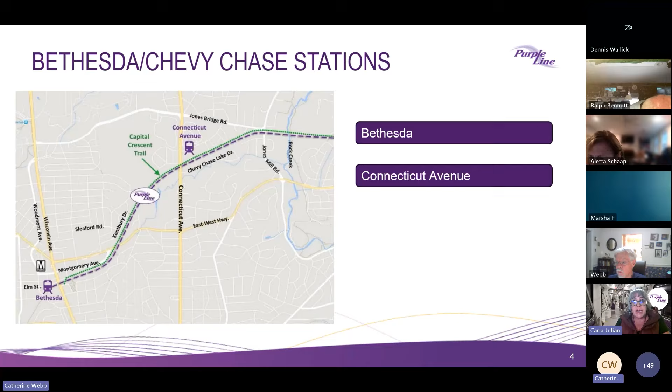The stations that we're looking at tonight are Bethesda and Connecticut Avenue.

And with that, I'm going to hand it over to Ray Biggs to introduce our fall progress video. Thank you, Carla. Again, welcome everyone, good to see you tonight, thank you for joining us this evening. As Carla mentioned, in our new fall 2025 progress video, the momentum on the Purple Line in 2024 has now evolved into a tremendous transformation throughout 2025. This video highlights some of the transformational progress across the 16-mile Purple Line alignment. So Chris, without further ado, let's play the video.

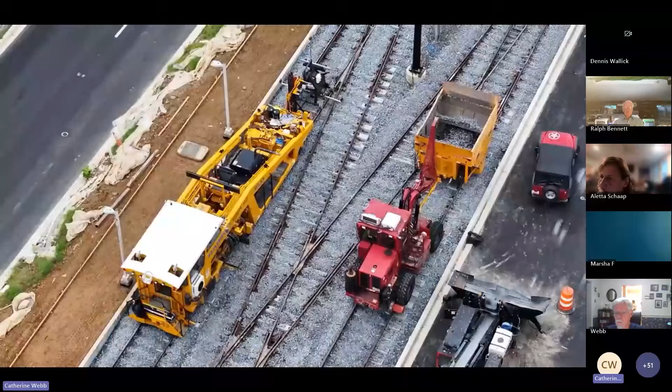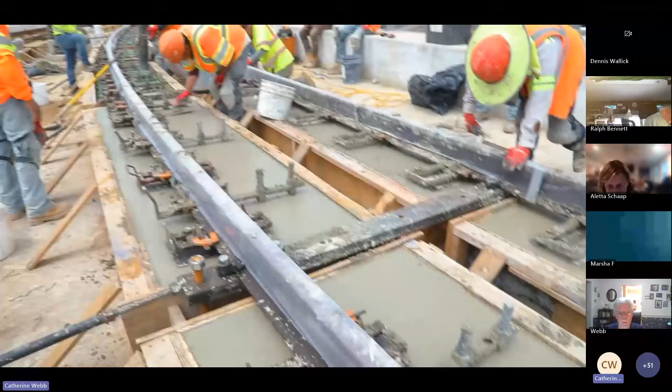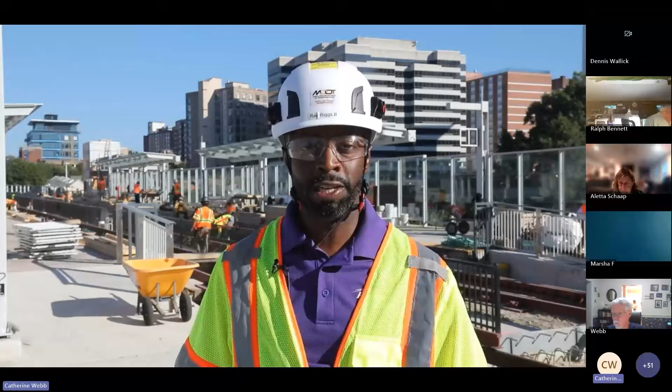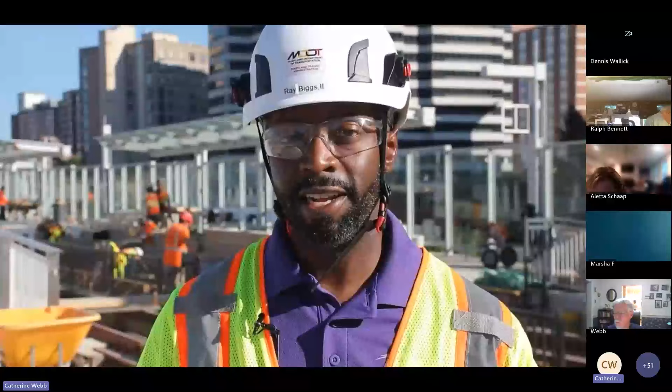It has truly been the year of transformation for the Purple Line project. With construction now more than 80% complete, the new Purple Line tracks tell the story. We are excited to share that tracks have been installed across all of Prince George's County, with more than 75% of tracks complete across the entire project.

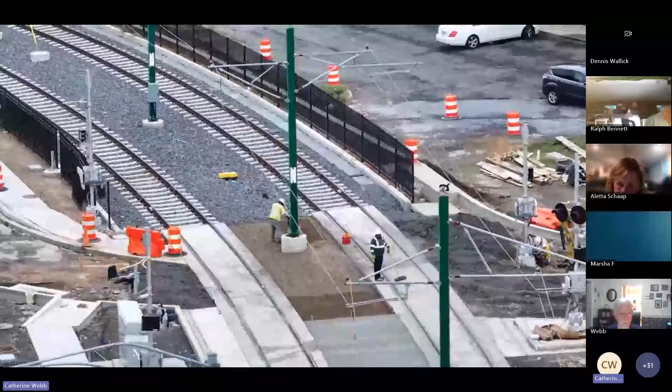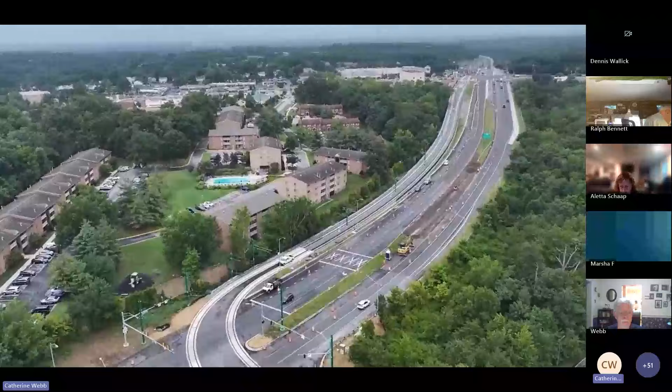Along with track installation, you have likely seen many overhead catenary system poles installed this year. These poles carry the wires that power the Purple Line. At the eastern end of the project, the poles and wires are not only installed, but have already been energized, ready to power up the light rail vehicles. Just a reminder, always assume light rail system power is on, and please be sure to avoid the Purple Line right-of-way areas. Only cross at designated areas and crosswalks, and be sure to look both ways before you cross.

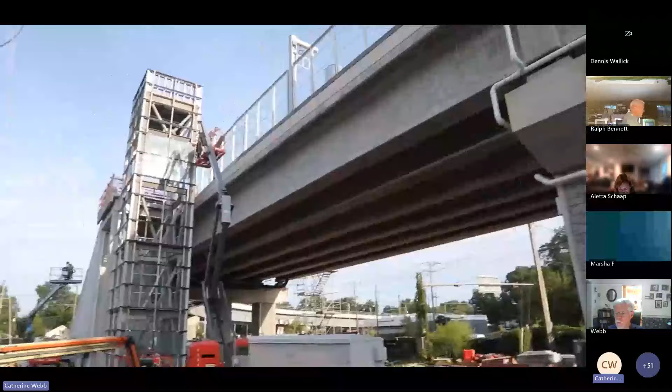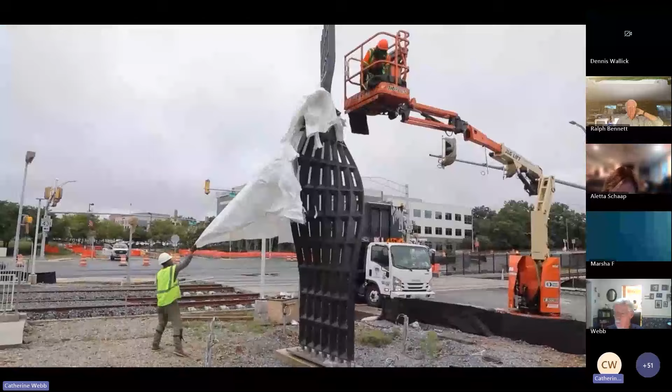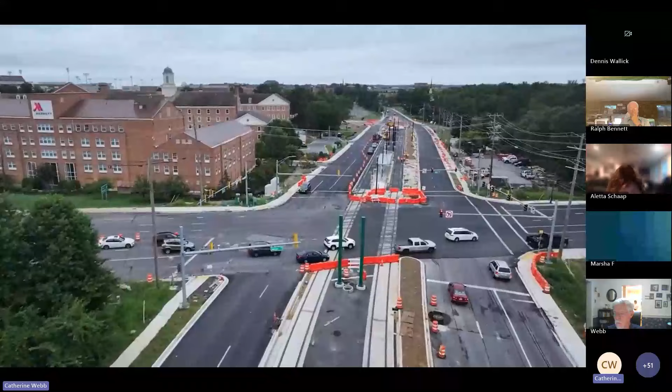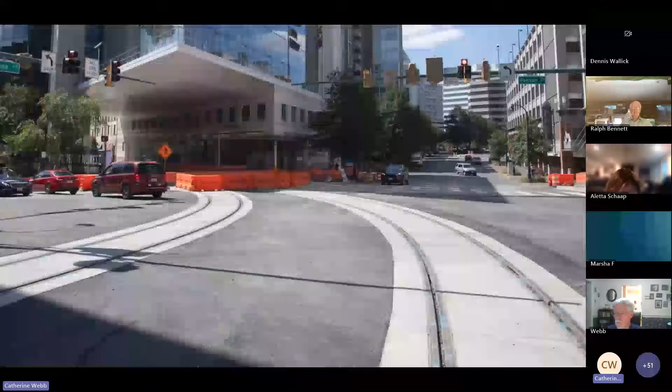Across the corridor, stations continue to progress. Canopies, benches, and art and transit installations are being added. Bronze spires in Riverdale, vibrant colors in Long Branch, and more to come. More than 20 roadway crossings that once required detours are now in their completed phase, including the complex intersection of Wayne Avenue and Fenton Street. With the tracks in place, Silver Spring residents can see the vision of a more connected community becoming reality.

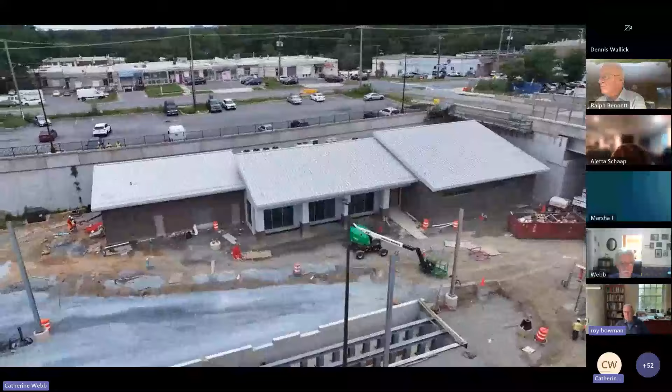In Lyttonsville, the second operations and maintenance facility is taking shape. This building and track yard will support the light rail vehicles with an additional control and communications facility and a smaller maintenance facility located in Montgomery County.

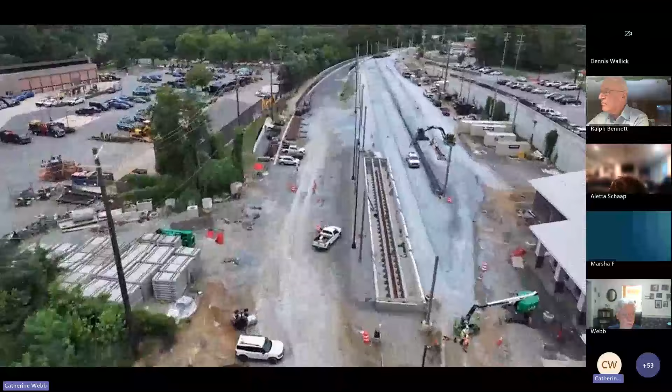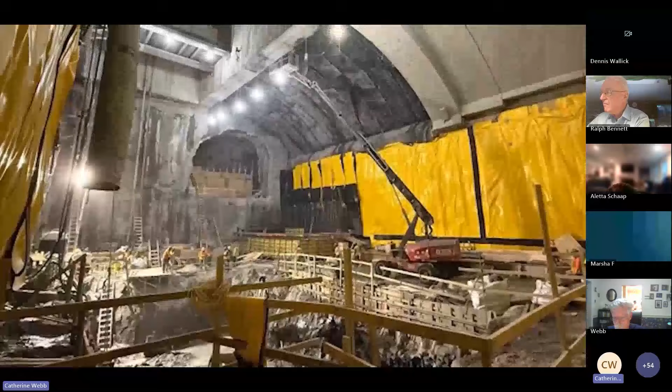Another major milestone is the completion of blasting in Bethesda. After years of excavation, the shaft and cavern, located nearly 150 feet, or about 15 stories underground, is finished. Crews are now focused on waterproofing and concrete work, building out the cavern and elevator spaces.

Perhaps most exciting during our year of transformation, dynamic testing of the Purple Line has begun. Light rail vehicles are running during nighttime hours between the Glenridge Operations and Maintenance Facility and New Carrollton. The vehicles and track systems undergo rigorous checks of safety, operational, and communications. With New Carrollton testing underway, it won't be long before testing expands westward along more sections of the Purple Line.

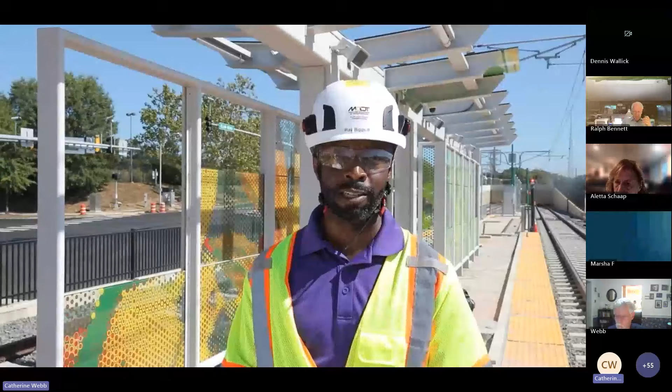Seeing a Purple Line light rail vehicle arrive at the first of our 21 stations is an exciting reminder of the hard work and dedication all of our teams bring every day to complete this transformative project. Thank you for your support, patience, and engagement over this past year.

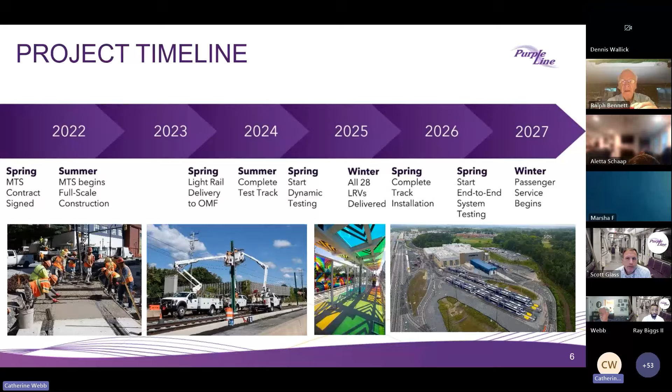Here you can see the timeline graphic with some of our upcoming major milestones, including our winter 2025 delivery date of all 28 light rail vehicles to the Glenridge Operations and Maintenance Facility on Veterans Parkway, and completing track installation in the spring of next year across the entire alignment. Though I do want to highlight that all track has been installed in Prince George's County. So tonight you'll see and hear more details about the expanded dynamic testing milestone achieved earlier this summer, and where the Purple Line will expand this dynamic testing throughout this fall and into 2026.

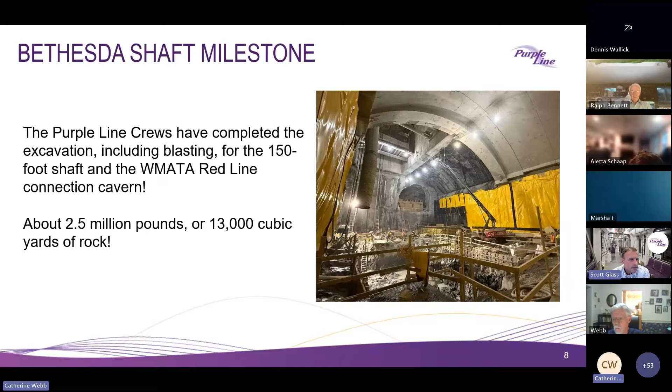Bethesda shaft, this is looking down at the street level. You can see the concrete has been brought up on the shaft up to the street level at this point, and this is our recent work through the course of the summer. We've completed the blasting and the major excavation to this cavern at the bottom. We have been progressing the waterproofing and are nearing the completion of the waterproofing installation around the cavern and in the bottom of the shaft.

We've recently begun the first of the structural concrete placements in the elevator pits and ejector pits at the bottom of the shaft. Upcoming work will be continued placement of concrete in the cavern to make the elevator lobbies and rooms that are in the connection area, and begin the construction of the elevator and the stairs from the bottom cavern up to the lobby level.

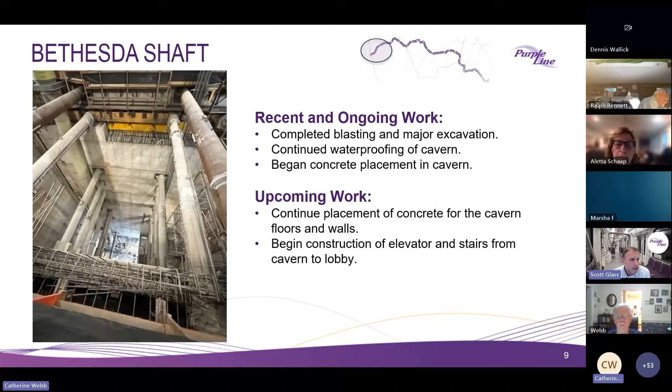Also, we'll be starting in the coming month the removal of the west portion of the temporary building that is on Elm Street. This will give us access to start the excavation, which is an open cut excavation for the lobby level at the street level. And soon enough, in the same area, in late fall, early part of next year, we'll be starting the concrete work in this underground lobby area.

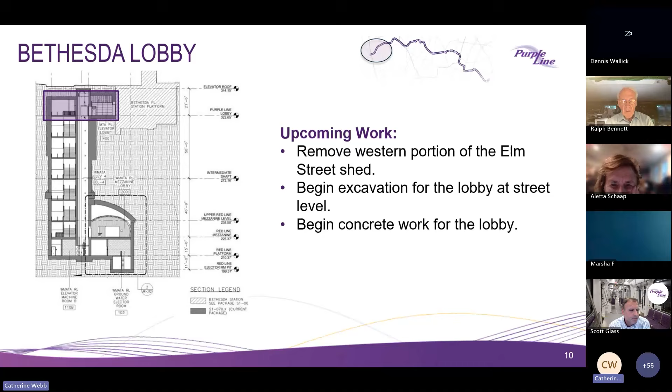On the Purple Line station, we've made a lot of progress completing all of the egress, stair, elevator, escalator structures, and also the track through the station. We've completed the installation of the elevators and the elevator machinery. Mechanical and electrical systems are being continually progressed, nearing completion. We've continued the retaining walls in the Woodmont area that you see in the photo here, and we've begun construction on the elevator head house at the street level.

Upcoming work will be completing all of the interior station elements in the next quarter, all of the mechanical systems and the permanent power installation and startup. And we'll complete the construction of the head house at the street level. Also, we'll be bringing through the overhead catenary system through this portion of the station to the termination at the west limit of the Purple Line.

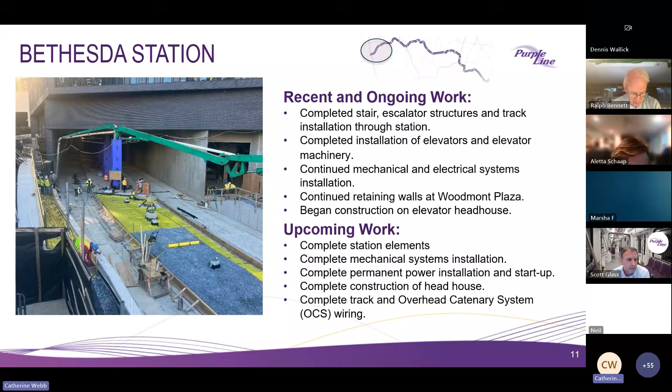In the Bethesda enclosed trainway, the BET, you can see the picture here. The concrete slabs underneath supporting the tracks have been completed for three-quarters of the tunnel underneath the Bethesda trainway. We'll be continuing the track installation through the course of the next month and a half out to the limit of the west end of the Purple Line.

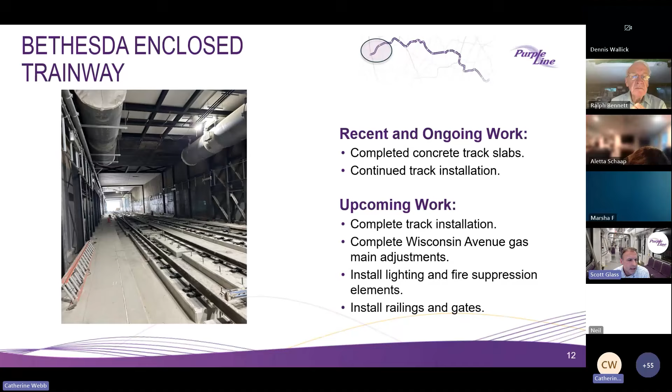Also coming up, we have work that we'll be doing on Wisconsin Avenue in the spring to install a couple of utility connections, gas main adjustments. And in the tunnel itself, we'll be finishing up installing the lighting, fire suppression systems, and finishing the railings and gates in this trainway.

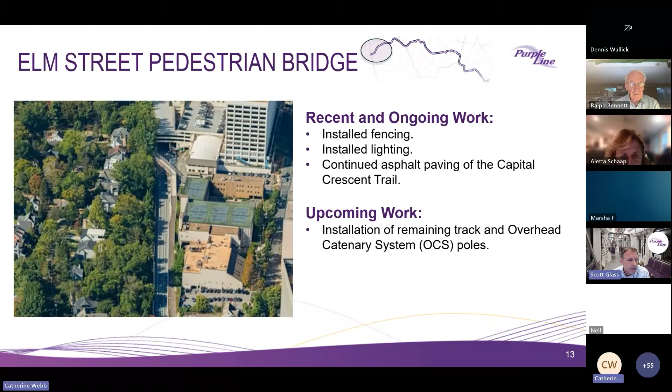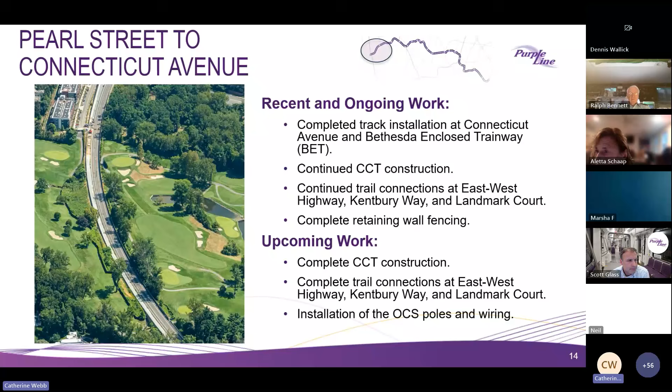Next slide. At the Connecticut Avenue station, our station here is nearing completion.

Recently, over the last two quarters, we've completed a lot of the electrical and mechanical works, but the major milestone was getting the permanent power to the station. We've completed all of the precast stair structures and the structural steel at the stair entry. Water and sewer services is another milestone that we finished up this last quarter.

We've completed the elevator installations, and we've been continuing on the finish elements of the station itself, which you can see in the picture there with the art in transit, the benches, and windscreens.

Also recently, we've poured the last of the concrete on the CCT bridge, and we're preparing here in the next month to install the final fencing on the CCT bridge over Connecticut Avenue and completing the CCT trail connections to the station and those local developments that are there. We'll also have the overhead catenary system being installed through this corridor.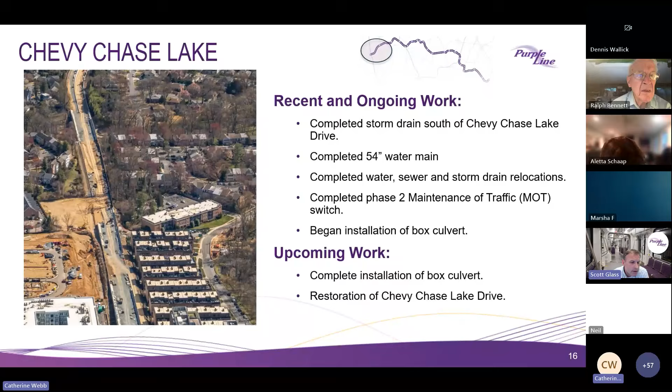We've begun the box culvert installation, a precast concrete box structure that is open cut and set into the ground. That work will continue in this phase 2 over the upcoming month and a half. We should complete the installation of the box culvert this month and fully restore the Chevy Chase Lake Drive area by the end of the year.

Jones Mill Road has been progressing quite well. We've had a very long challenge with the temporary support of excavation, which we've recently completed for phase 2 of the bridge construction. That's enabled us to begin the bridge foundations for this second half of the Jones Mill Bridge, which are going to be complete in the next week.

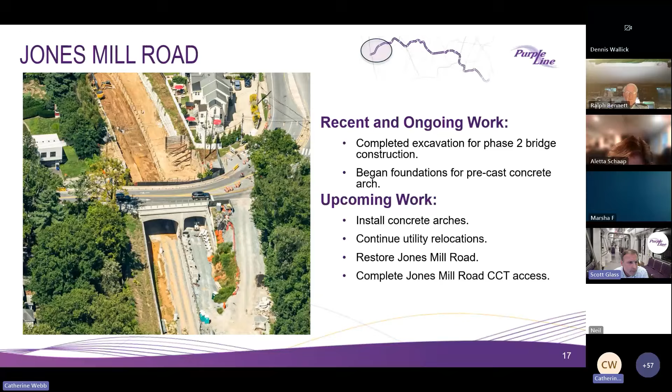Very soon, we'll be installing the concrete arches that span both the Purple Line and the CCT, with some utility relocations happening in the month of November. We'll continue right through over the next quarter to fully complete the bridge crossing and restore Jones Mill Road. The final activities will be the final tie-in of the CCT access there.

In the coming weeks, we'll be setting the precast concrete bridge structures on the Jones Mill Bridge. We have planned the week of November 2nd through November 16th to temporarily close that connection so that we are able to set up the equipment to erect those precast structures and set them in place, and also do the necessary utility relocations. This closure will be between Jones Bridge Road and Coquelin Terrace, necessary for the crews to complete the utility relocations and construction of the Purple Line underpass.

Pedestrian access through the work zone is going to be maintained. Please follow the on-site signage when it's in place during that time, and note that weather and unforeseen conditions may impact the work schedules.

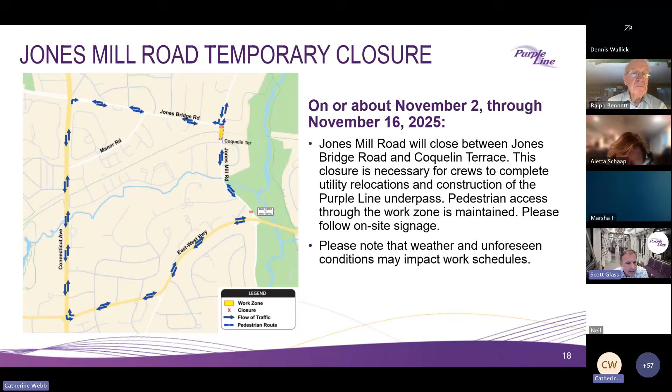At the Rock Creek Park and the CCT tie into the Rock Creek Trail and Rock Creek Bridge, we've completed the CCT underpass just to the east of the Rock Creek Bridge crossing.

Many significant retaining walls have recently been completed, allowing us to prepare the alignment for rail grading and finish the CCT. We've installed the CCT bridge concrete and are starting the trail connections from the CCT to the Rock Creek Trail System.

Upcoming work: this area will transform as we complete the trail asphalt paving connection into the trail system, bringing the asphalt paving program from west to east on the CCT. We'll complete the CCT asphalt paving, grass swales, fencing along the CCT retaining walls, and lighting.

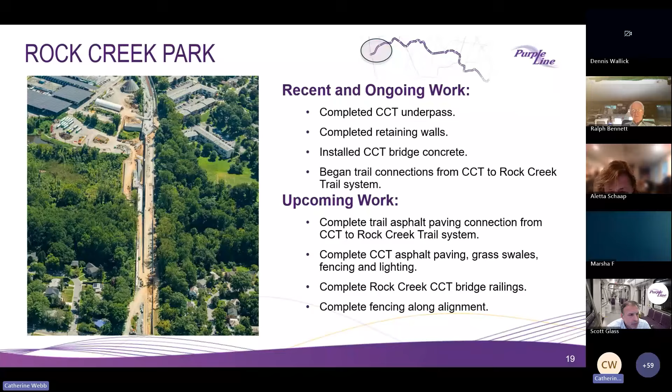We have the rail fabrications in progress right now for the Rock Creek CCT bridge railings. Those will be completed, and we'll complete all the remaining permanent fencing through this corridor.

And with that, I'll hand it over to Surren to run through the systems and testing.

Thank you, Scott. Good evening, everyone. I'm going to spend a few minutes talking about our current and upcoming test activities, and I'll start with a short video that highlights what we've been doing and what we plan to do in the coming months. Catherine?

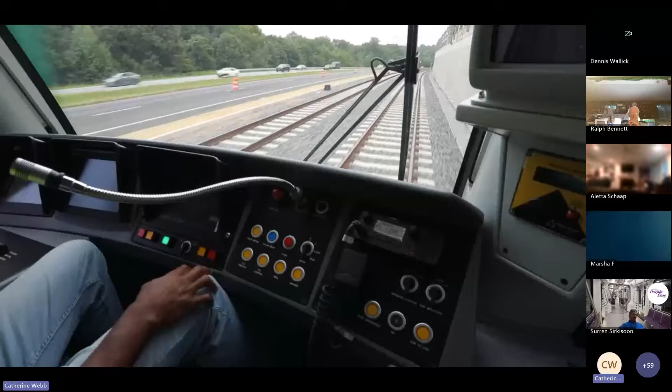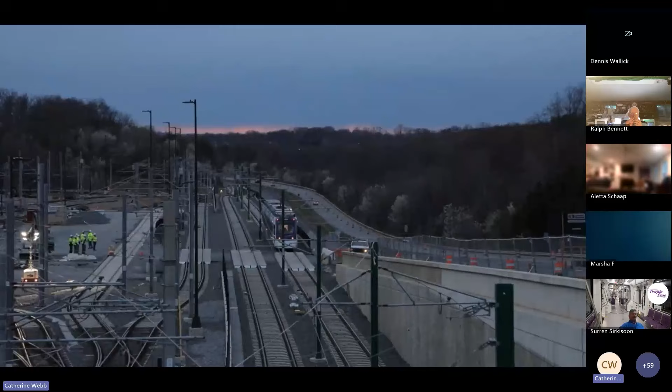Welcome to the Purple Line. Next stop, New Carrollton.

So as you can see from the video, we are currently testing. We're testing in our first, what we call our first test section. We've defined our test sections on the project based on how we control the trains, essentially on the limits of the train control system, so that when we test, we're testing the trains with power, with train control, and with other ancillary systems to complete as much as possible the testing before we move on to the next section.

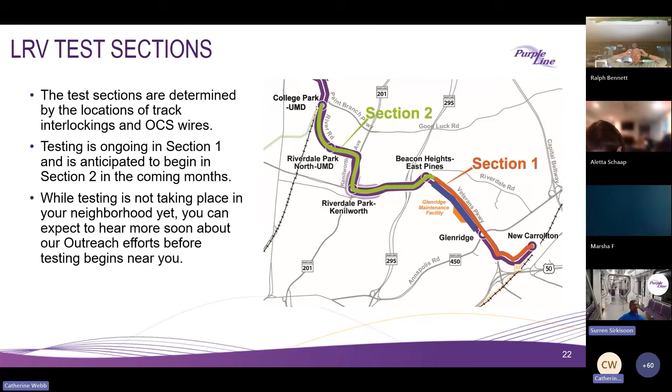What to expect during testing: during live train testing, what we call our dynamic testing, where we're actually using a train on the alignment, what you, the public, are going to see for the most part is how we protect our intersections.

Our maintenance of traffic crews will control intersections in the test area, and control of the intersections will include uniformed police officers and our own flaggers. We may intermittently have some road closings and traffic stops.

So we develop our maintenance of traffic protocol to facilitate our train testing on the alignment and through the intersections, very specifically for the individual test sections, because they're all a little bit different. They all have different challenges.

When we do test with trains, our hours of testing will typically be at night from 9 p.m. to 5 a.m. As I mentioned, we're currently testing in the first section on the eastern part of the alignment.

We plan to continue testing through the end of '25 and then move westward, towards the western limit of the project.

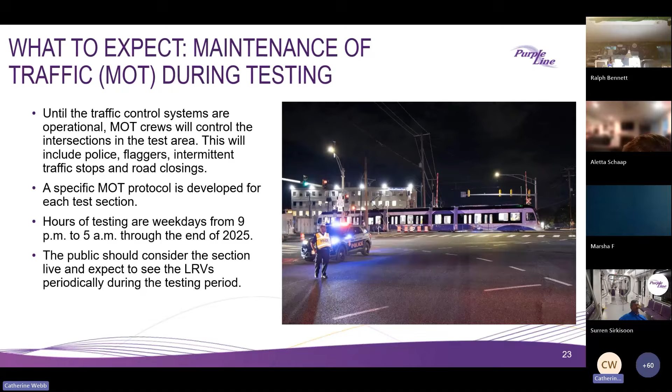What to expect from our testing outreach as we get closer to testing with the LRVs in your area: coordination with State Highway Administration and other third parties.

Advanced and timely communications to elected officials. On-site notifications, which we typically do with variable message signs in the area. We're going to have in-person outreach to schools, local businesses, and any impacted communities to let everyone know what's going to happen, when it's going to happen, and what that's going to entail.

Public notifications, and of course our website is one of your more useful tools. We post updates on our purplelinemd.com website. Our testing, first and foremost, is always focused on safety and getting the message out there in a manner that surrounds safety for you, the general public.

Testing safety while we test. We are currently testing in test section 1, but we are also testing at the Glenridge maintenance facility, where we have a test track. Some of you may have driven past it. We test there almost daily. The LRVs we've got today, our 22nd LRV got delivered, 22 out of 28 now. So as you drive by that area, you'll see LRVs running up and down the test track.

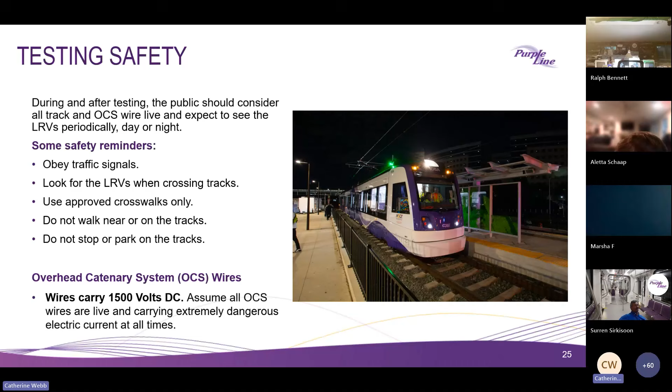All right, most of you know we're out in the community a good bit, and we're always open to new ideas if you have them. Over this last year, we've attended 18 events, including the Bethesda Arts Festival, Sligo Creek Elementary School Back to School Night, National Night Out, and many others. So if you have interest in us coming to a community event, please let us know.

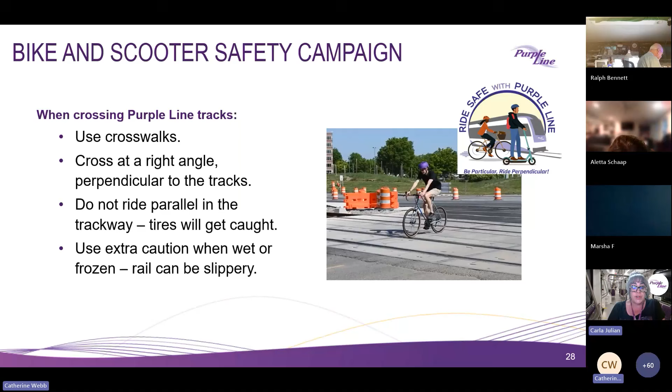The project team has been very engaged with CAT members over the years, so we appreciate your engagement with us. CAT members were contacted early in 2025 about continued service, and a lot of feedback was received. Thank you for your time and effort if you are a CAT member. All of that feedback has been implemented, and the team intends on staying very engaged as we move through the duration of the project.

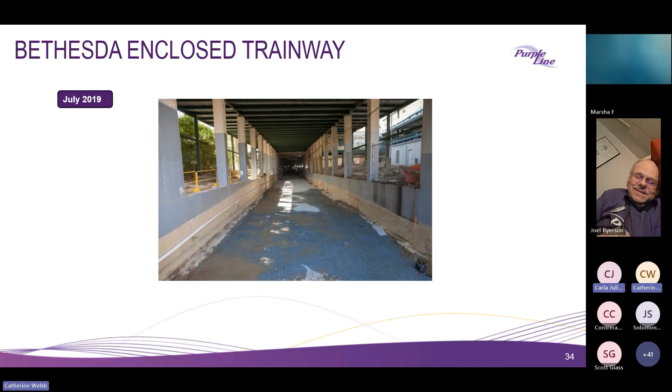Good night. Good night, Joel. Hope everything goes well tomorrow.